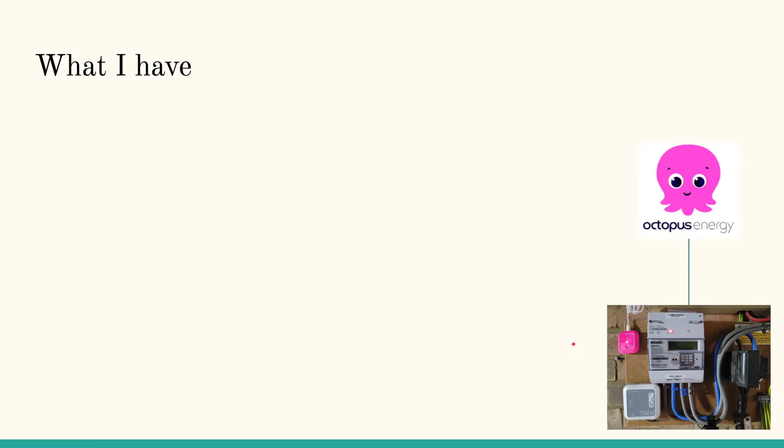So what else have I got? I've got solar. And you can see... oh, go on then, Ray, feel free to interrupt me.

Just a quick query - that pink mini hub thing, do you have to be on a special tariff to get that? No, if you're on Octopus, there's a form on the website. You can fill it in and then it will arrive in the post.

Right, thank you. This Octopus thing, where does it get its power from, and do you need any special permission to connect it to the smart meter? Because I've got an old SMETS1, which is useless, and they won't replace it for another 9 months as a queue. It only updates with EDF once every half hour, but I want something I can just clip onto the meter without having to go through any regulations, that will give me this real-time update.

Now, the last house I had, until it stopped working, British Gas had supplied a little induction coil that clipped around the live wire and, through a battery system, transmitted that in real time to a device in the house. That's all it was doing - measuring the current going through the live wire. That seemed very simple, but I can't seem to get a replacement for it.

Yeah, so I'll answer that. You can see in that picture I've got Harvi, and this is the solution for myenergi. This Harvi just clips on the wire, as you can see here, and it transmits it to the myenergi hub. So that's one option you have for doing it yourself.

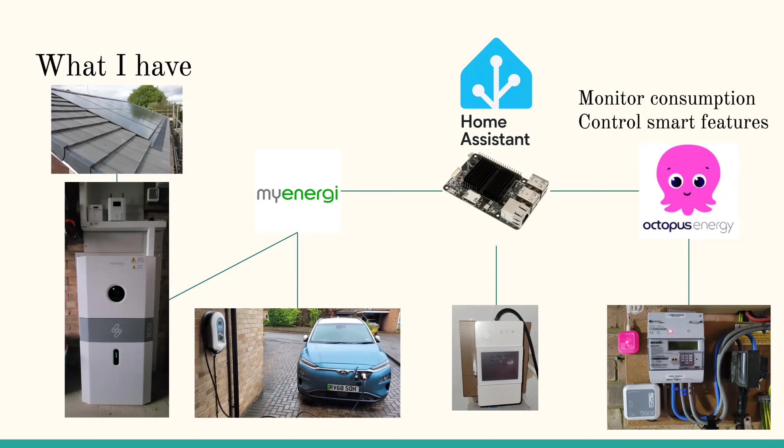And of course, I'm bringing all these bits and pieces together via Home Assistant. Home Assistant automation. So with Home Assistant, we're doing a few different things. We're monitoring everything. So I'm monitoring all the real-time data coming from Octopus. I'm monitoring all the data coming from solar and from a battery and car charging and so on. But I'm also using Home Assistant to control the smart features. So we've certainly got smart features on our battery. You can enable it to charge or discharge or turn off and such like.

And also, of course, you can control the smart meters for your car charging. So it's a two-way process, we're doing monitoring and controlling. And Octopus is probably an unusual power company because it's got a lot of smart features in it, and we'll talk about that later. So yes, Home Assistant is sending messages to Octopus Energy to do various things, we'll talk about that. So that's roughly what I've got in the house. So the goal is, this is what I've got, I want to get to a zero bill, lower carbon footprint. How do we do it?

So now before we launch into the details, Pamela stroke Steve has got your hand up. Oh, hello. Sorry about another video, it's not working.

Yes, I was just wondering about the electric vehicle, what is the petrol equivalent of the carbon footprint of the battery? How many miles do you have to cover? There was a discussion on Nextdoor this morning, so I looked it up, and it's 13,500 miles, that's where a typical electric car regains the carbon footprint difference between an electric car and a petrol car. Oh, 13,500 miles, I see, oh right, because there's a lot of it. I'd heard it was 50,000 miles, but that's gone down a lot. Yeah, I mean, electric cars are much simpler, of course, they consist of a battery and a motor, basically. So most of the carbon... I don't know why they're so expensive. Well, they're hardly coming down in price, actually.

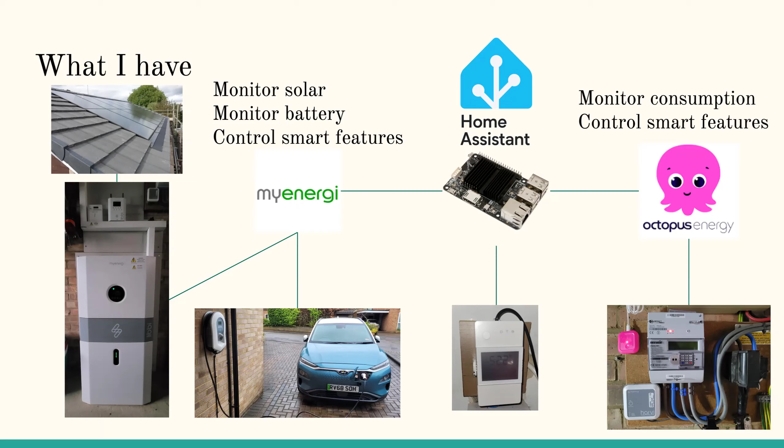So, energy tariffs overview - this is going to be a quick run through. Don't think I'm focused on Octopus unfairly; I personally think they are the best for these smart tariffs, but more and more other energy companies are coming up with similar tariffs, so you can go to your own energy provider and see what they've got. The main point is what they're trying to do is promote demand flexible pricing, which is a kind of industry term, and the goal is to better balance the grid.

What they really want to do is move electricity you're consuming at peak rate instead to off peak. There's lots of good information from Octopus, and they talk about how, just from one energy supplier, they can encourage their users to shift their usage such that one or two gas power stations are simply not fired up that evening. So this really does matter and reduces the carbon footprint of the grid.

To encourage you to shift your usage, Octopus offer lots of tariffs. The main one everyone goes on by default is called Flexible, which is just a standard variable rate tariff. They've also got a tariff called Go, for electric cars.

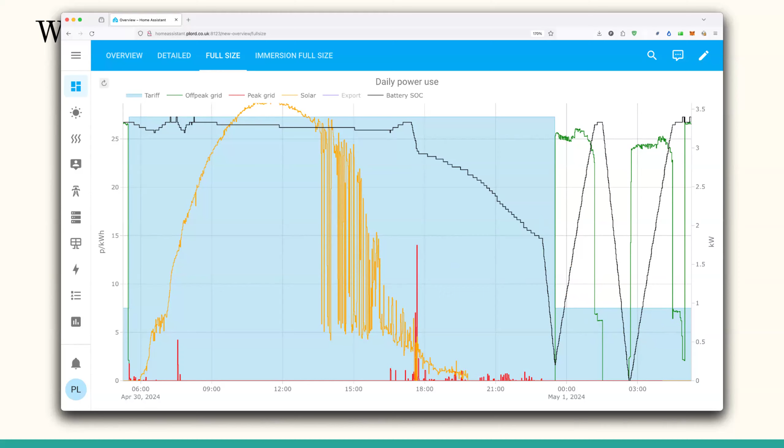Once we've got that as a background for our graph, we can add in other information - we can add in solar, so we can see how much solar we're getting. We can add in the state of charge of the battery, and importing electricity, both at peak rates and off-peak rates. What I've done is coloured in any electricity import during peak times as red, and off-peak imports as green. So my goal is to get rid of all the red and have everything green - so all my electricity then becomes 7.5 pence per unit when I'm importing.

And of course we've got exporting - this is the blue one, this is when I'm selling excess electricity back to the grid. We're going to keep coming back to this graph and highlight various things, and look at how you can configure home automation to make the best of what you're doing. So it ends up as a pretty busy graph, and we're going to drill down into it, but I find it a useful way to look at my house consumption.

Nick? Yeah, can you hear me? Yep. Thank you - if you, I've got solar panels and an EV. You talked about the fixed outgoing, 15 pence a kilowatt hour for exported power. Can you get that deal, that payment, if you're also receiving the feed-in tariff? Because we've had our solar panels for quite a while.

David might be able to better answer that because we were just chatting about it before we started. But I believe David has actually successfully managed to keep his feed-in tariff and move to the export.

So the main thing, FITs, there are two parts to it. You get a payment for whatever you generate, and then you get a payment for what you export. The export has a wrinkle in that if you don't have measured export, then you would have deemed export, where they estimate that you export half of what you generate. That's how FITs work. The various tariffs and payments then varied over time, depending on when you had your system installed. We had our system installed in 2017, so we're on the rubbish tariff.

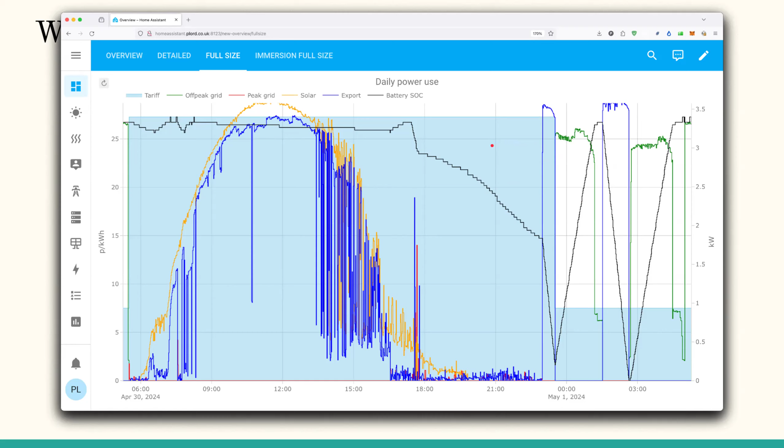So I'm just introducing one of the graphs in Home Assistant. We can go live a little bit later. So what I've done with Home Assistant is to break all this down into separate rules. What I'm trying to do is I've got Octopus tariffs, a battery, solar, electric car, hot water, and I want to control all these devices and manage them in the best way to get my electricity bill down as much as I can.

And so I've actually numbered all the Home Assistant rules, and we'll look at them one by one. So this is rule 1, a screenshot in Home Assistant, and this is what it looks like. It's pretty accessible, you don't have to be a programmer to do this stuff.

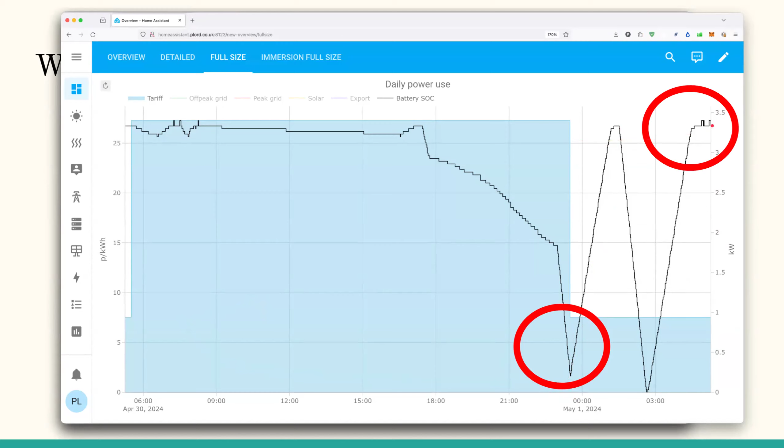And I've got a 1B, which is the opposite. When we move from cheap to high, I want to stop charging my battery - I really don't want to charge my battery with expensive electricity. So I do the reverse. Coming back to my plot here, what I've just talked about is when cheap rate starts, we start charging my battery up, and when cheap rate finishes, over here, then we stop charging the battery.

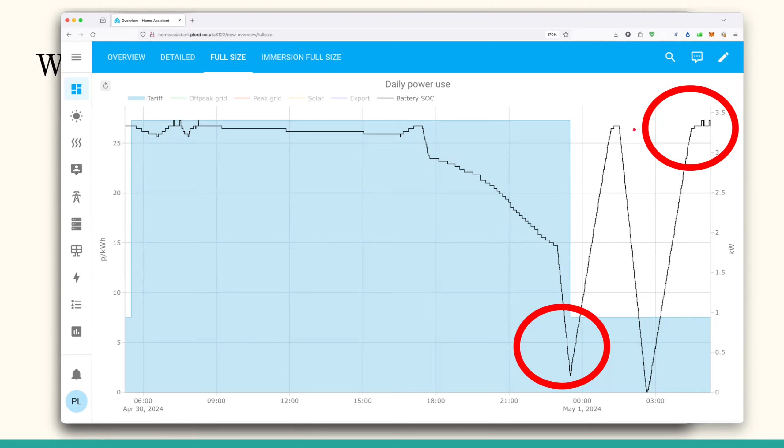So 2 little rules - my first case, charge your house battery when electricity is cheap. Nice and easy. Ignore these other bits and pieces, we'll talk about those in a minute.

So rule number 2 in Home Assistant, switch on my immersion heater. I've got here a template trigger, and if there's interest, I'm happy to dig into this. This is a little bit of, rather than an explicit comparison, just a little bit of code - if this is greater than that.

I'll dig into it a little bit. So if it's time to switch on the immersion heater, then I call switch on immersion heater. And likewise, when cheap rate ends, I turn off the immersion heater.

Now here's the thing about immersion heaters. So this is the graph, slightly different graph here. I've got the temperature of my water tank here. You can see here I've consumed some hot water. And this blue bit here is actually when I'm heating the water.

My goal here is to heat my hot water such that at the end of the cheap rate, it gets up to temperature. I don't want to heat the hot water too early because it's going to cool down during the night. So my cheap rate ends at 5:30am, and at 5:30am I want my hot water tank up to temperature, ready to use. I don't want it to be up to temperature before that. And it turns out it's not trivial to do this rule, because the start point when you turn on the immersion heater is a variable time.

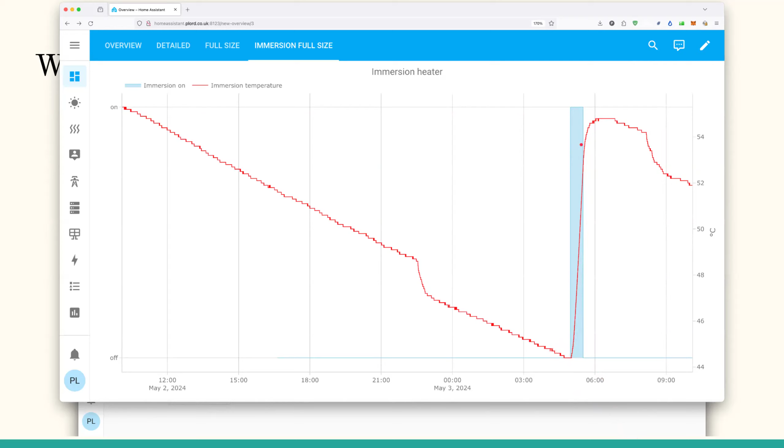So you start heating your water tank so that it gets to your target temperature exactly when your cheap rate finishes. There's a little bit complicated rules, and if anyone's interested in how I figure that out, I can go into that, not a problem.

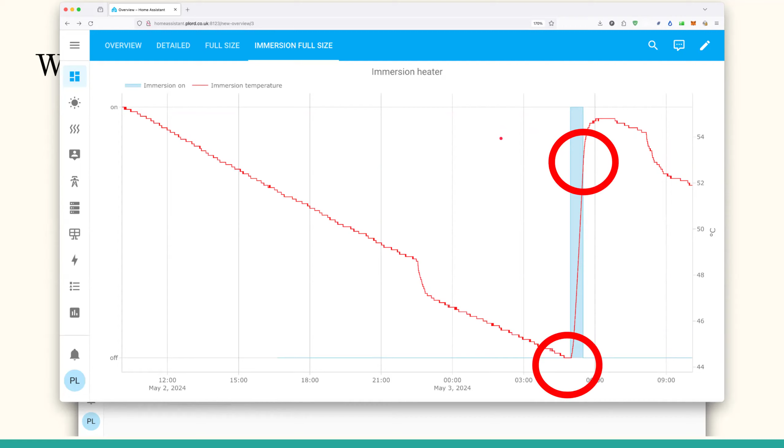Yes, so I'm choosing those 2 points with those rules. And it turns out, by the way, I've done the sums on this - heating hot water via cheap rate electricity is cheaper, both cheaper and greener than heating hot water with gas. In my case, your case might be different.

All right, Home Assistant Rule 3: export your battery before cheap rate. We sort of touched on this, and I didn't want to talk about it too early. So if you've got a sunny day, during the day, you've got lots of solar, your battery's at 100%, you're exporting excess. By the time you come to the cheap rate, you might have 60% of your battery left. So there's no point doing nothing with that, because you can get paid 15 pence per unit to export, but it only takes 7.5p to fill it up again.

So again, we've got this little template trigger. When that happens, we export our battery to the grid. And this is what we're trying to do.

Coming back to our graph here, what we're trying to do is this point here. So the black line here is our battery state of charge. We hover around 100% as we've got solar and so on. When the sun goes down, the battery then is discharging as it powers the house, goes down again. And in this case, when we're down to like 50%, you may as well dump that back to the grid, so your battery gets close to zero just as the cheap rate starts.

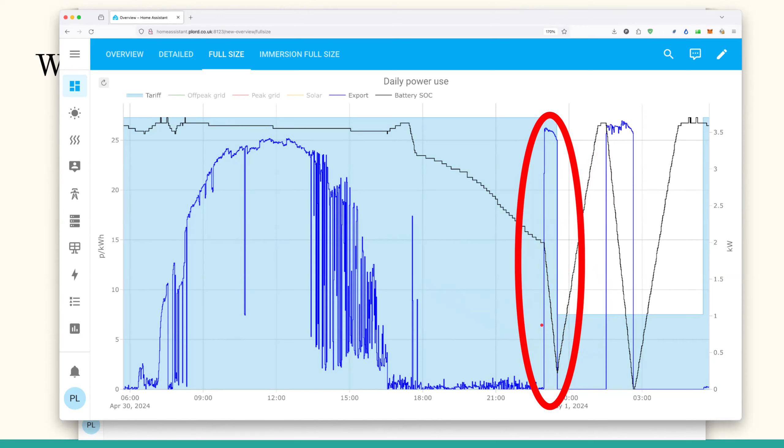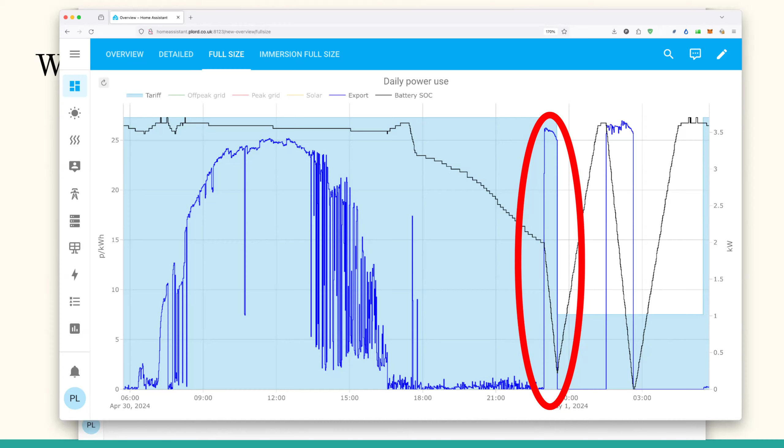David: Yeah, just a quickie - you may be covering it a bit later, do you have any views on the impact on the battery lifetime? Speaker: Yes, I've got a note on that. Okay, I'll defer that. Yeah, very good point, actually I was thinking of you when I put it in the slides.

Moving on to Rule 4. So this is a cheeky one, right? So during cheap rate overnight, think about this for a minute - you can either just charge your battery to full during cheap rate, but if your cheap rate is big enough, you can sneak in a discharge and recharge cycle.

So that's exactly what I'm doing. During the cheap rate, I'm going to dump my battery out to the grid, which earns me 15 pence a unit, and then I'm going to charge it back up again, which costs me 7.5 pence per unit. And again, we've got the rule here: 120 minutes into cheap rate we're going to start exporting, and 190 minutes during cheap rate we charge again.

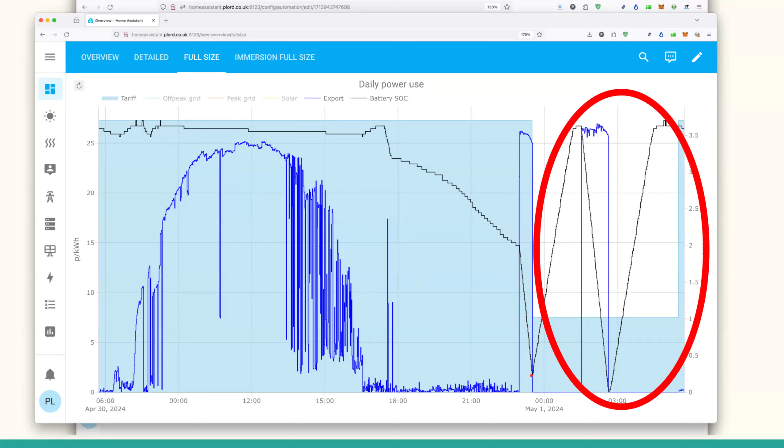So this is this weird graph here overnight. We start off, cheap rate starts, our battery is now discharged because any charge from solar, we may as well sell it back. We've charged our battery up. We've done a discharge cycle and a recharge cycle. And we'll talk about those cycles if you want.

So that earns you a bit of money. It's not a huge amount each day, but over 365 days a year, this is a significant input to reducing your yearly electricity bill. And if you automate it, it just happens every day, automatically, overnight, without thinking about it.

Okay, on to rule 5. So Ray.

Do you actually practice the 20% lowest charge to 80% full charge rule, or do you go from 0 to 100% on the battery? Good question, I'll probably touch on this later, but I'm ignoring that rule, and I generally ignore it for my electric car as well. You can take a different opinion and automate it however you want, but it seems to me that modern batteries, the last 2 or 3 years, this 20-80% effect is at least less important than it was 5 or 10 years ago.

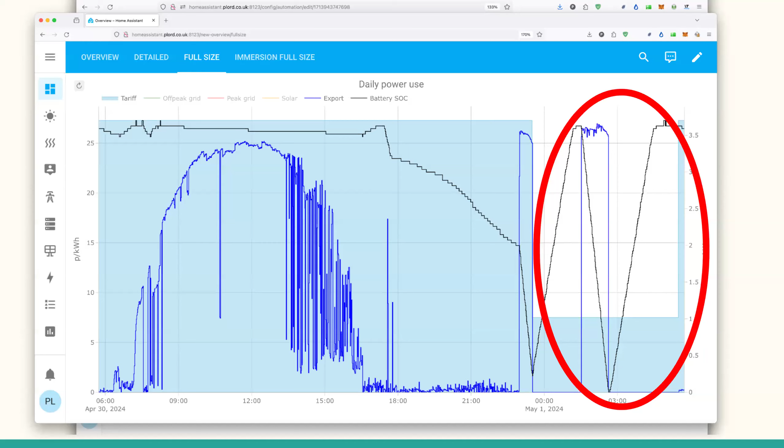Does your system, and also Octopus, know your battery capacity and its discharge rate and maximum charge rate? Does that get coded in right at the start? Octopus aren't particularly aware of my battery, so it's my home automation at home that's doing this charge and discharge cycle. The import rate and export rate is slightly different on my setup, but Octopus have got no clue about it really, they only know about my car.

I just thought that would be useful to them, because you can have lots of people with small capacity or small throughput systems, and one or two with large throughput systems. I guess that's going to come in the future though. Yeah, I believe that's what they're using with Intelligent Flux, which I'm not on, and that's where Octopus takes control of the discharge cycle. In my case, I'm not on that tariff, so my home automation is doing the battery charging and discharging.

So we've got this gimmicky Join Save. When you get a message from Octopus saying there's going to be a saving session at 5pm, you have to opt in, go on the app and press a button, but you can automate that. A Home Assistant rule, when Octopus tells you a new saving session exists, which is usually before it gets on Facebook or as a notification in the app, you can read this by the Octopus API. So your home automation can look for that when it happens and join the session. I always join the session regardless of whether I can make use of it or not.

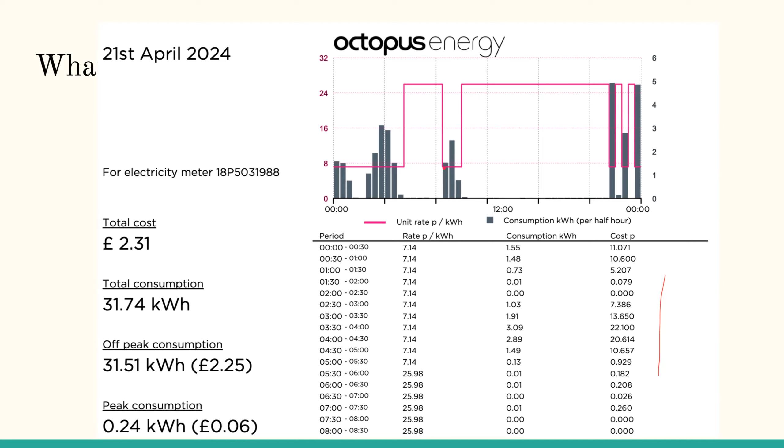And here's some summaries, if you like. So this is import, and you can see in this particular bill my average pence per unit is 7.3 pence, and including VAT and standing charge, this particular month was £63.97. And my export during that time at 15 pence per unit, no VAT, so that's earned me 77 pence.

So here I'm, whatever it is, 20 odd pounds in profit. And you know, so you've got to think about this. This is, I'm earning money as well as powering my house, as well as powering my car, as well as heating my hot water during the summer. So it's pretty good.

And in terms of pounds, so roughly, some rough numbers here. So my house consumes about 5,000 kilowatt hours per year. It includes hot water and charging. At a flexible rate, the standard tariff plan, that would have been about £1,500 a year. My solar generates roughly 4,000 kilowatt hours per year. Some consumed and some exported. Grid imports, mostly at cheap rate, obviously, because we've automated that. And we make money during the summer...

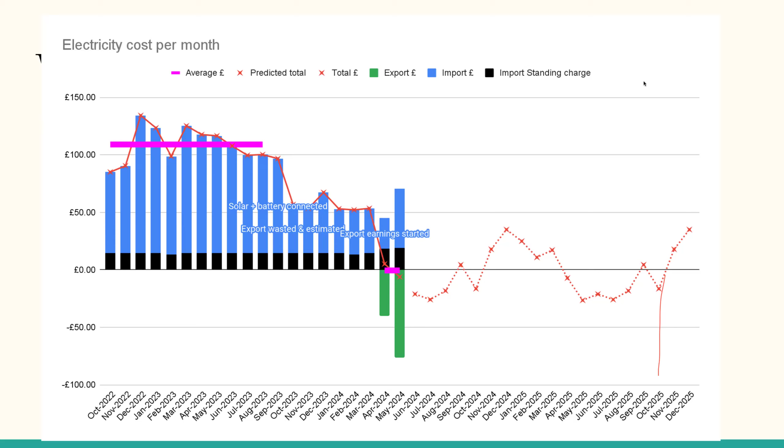So as I say, I have an automation that checks, did it reach temperature within the last 2 days? And if it didn't, then it triggers the Hive hot water just to bring it up to temperature. Excellent point. So I'm going to try and get through the rest of the slides quickly.

So carbon footprint, that was my other goal. And of course, we do have the climate folks on the meeting today. So pre-solar, before I got solar, the house was consuming about 5,000 kilowatt hours per year, which if you take the UK grid average, which I think is about 220 grams of CO2 per kilowatt hour...

That means per year, my electricity carbon footprint is about 1.1 tons. That's prior to solar. Now, the solar, 4000 solar, saves about 0.9 tons. Shifting from peak to off-peak.

Now, here's an interesting thing. So on average, throughout 24 hours, the carbon footprint of the UK grid is about 220 grams per kilowatt hour. Overnight, it's less because there's less demand, and so less gas-powered grid. It's about 150 grams per kilowatt hour overnight. So if you can move your peak to off-peak, you're actually reducing your carbon footprint, because you're not consuming electricity from a gas-powered power station.

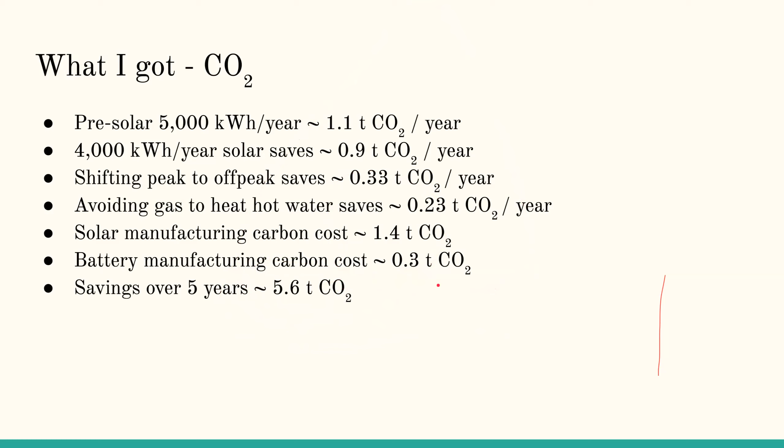So over 5 years, this is saving me roughly 5 tons of CO2. And you've got to bear in mind that this is hot water, car mileage, and consuming devices in my home exactly the way I want to. I put the dishwasher on, I put the washing machine on, and so on. So I'm not changing behavior. So we are certainly seeing a reduction of CO2, and I'm sure we can dispute and discuss these figures.

And this is my carbon footprint estimate, similar sort of graph. And the prediction really is that during the summer, because I'm exporting solar, I'm actually carbon negative - I'm actually gaining. But there is a carbon cost during the winter. And the average is I'm still getting a carbon footprint, but it's less than what it was.

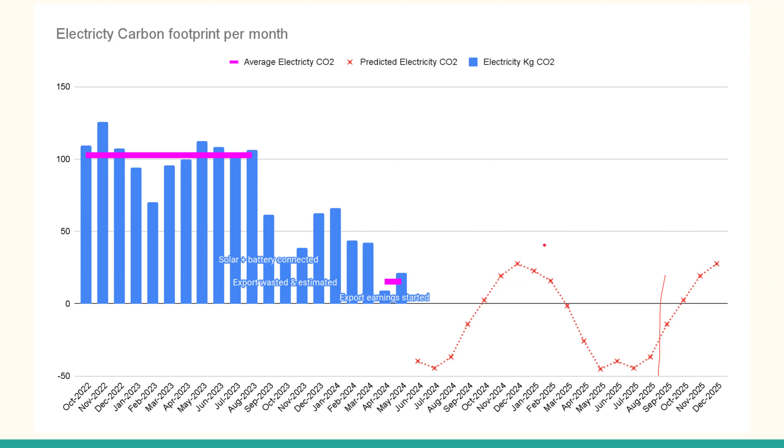So, summary - some pros that I'm seeing. My average electricity bill should be less than zero. This is partly solar, partly tariff plans, and partly gluing all these bits and pieces together with home automation.

Smart tariffs encourage you to consume off-peak electricity because it's cheaper and greener. Even if you don't have solar and cars and so on - though from the questions, some of us do - you can still buy into this thinking using things like a tracker tariff plan or saving sessions. But the more storage you've got at home, whether battery or hot water, the more you can consume off-peak versus peak. Home automation isn't strictly necessary, but it certainly helps to do things automatically.

Some concerns - some of these have already come up. You need to put some effort into getting this set up. You need to install home automation and set up the rules so you charge the battery when it's cheap and export it when you get revenue, and so on. But it's not too bad - you've seen some screenshots of the sorts of rules you can set up.

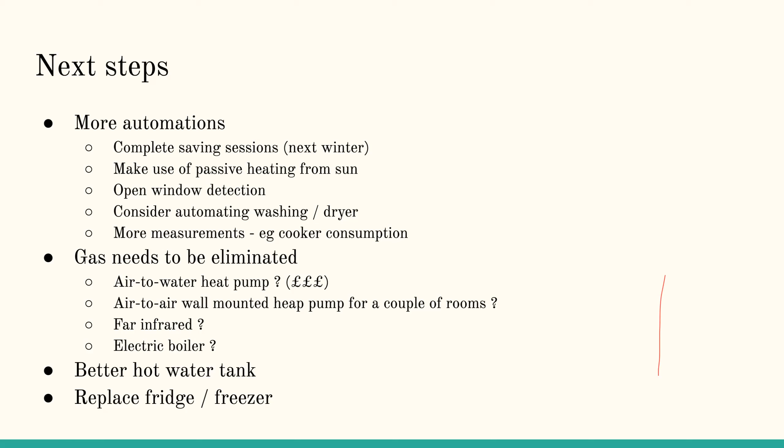And some references, so I'm going to go from there. I'm going to go to, this is live, Home Assistant Live. And what I'll do is come with some questions and maybe I can answer them by doing this. So Bernie, you got a question? Oh, hang on.

Just a quick question about Octoplus Rewards, because I have been using it. I was a bit disappointed as to what we were getting from it. I'm wondering if the fact that we aren't earning much is because we have solar panels, we've had them for a while, and Octopus, to run this scheme, have to estimate what your normal consumption has been in the past. Now, have you got a house battery?

Yes. So what you really need to do is, in the saving sessions, instead of trying to reduce your usage, export your battery during the saving sessions instead. Yes, I've picked that up today, and that's something I think I will be looking at. I'm just trying to wonder, as I've had solar in the past, they've been looking at my previous usage, and it's obviously been very low.

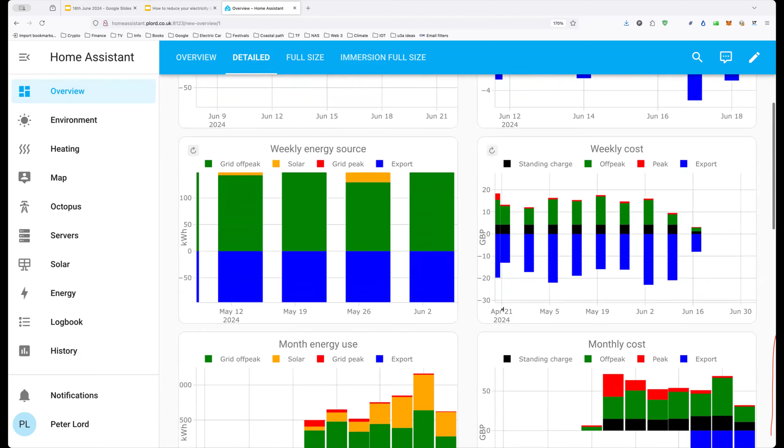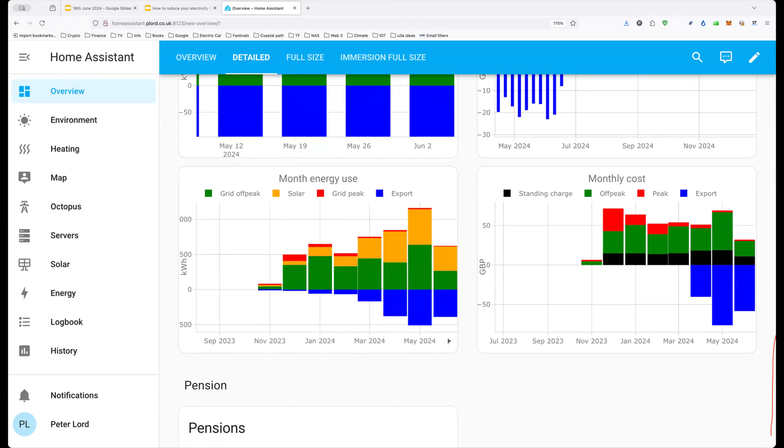And it's kind of useful to plot those sorts of values weekly and particularly monthly. You can see, hopefully when I've got it running long enough, these numbers over summer and winter periods as well. And also I draw this full size because my eyes are starting to suffer. I mean, these graphs are quite nice. You can turn them off, you can play around with them a bit.